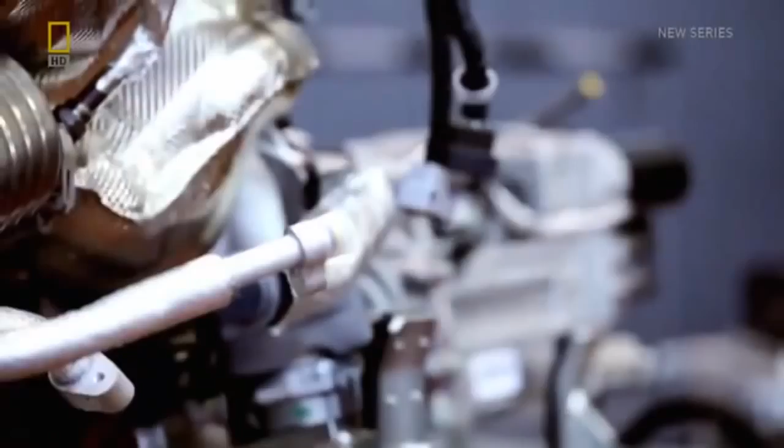The National Geographic Channel has been given unique access at the Lamborghini factory to witness the creation of some of the car's first incarnations.

This is Sant'Agata Bolognese, a typically picturesque town in the heart of Italy's Emilia-Romagna district. But it is in fact anything but typical, as it's home to Lamborghini, one of the world's most renowned supercar manufacturers. The factory is situated in the heart of what is known as Motor Valley in northern Italy.

Sant'Agata is intrinsically linked to Lamborghini's success, according to its head of communications, Raffaello Porro. Everybody in the world recognizes our cars come from Sant'Agata Bolognese. And so our factory is a kind of temple where people come - they can say it's a pilgrimage - to visit where those cars come from.

The factory has seen many changes over the years, but its purpose has never wavered: to produce vehicles that challenge the status quo. And a largely local workforce is a vital part of that ethos.

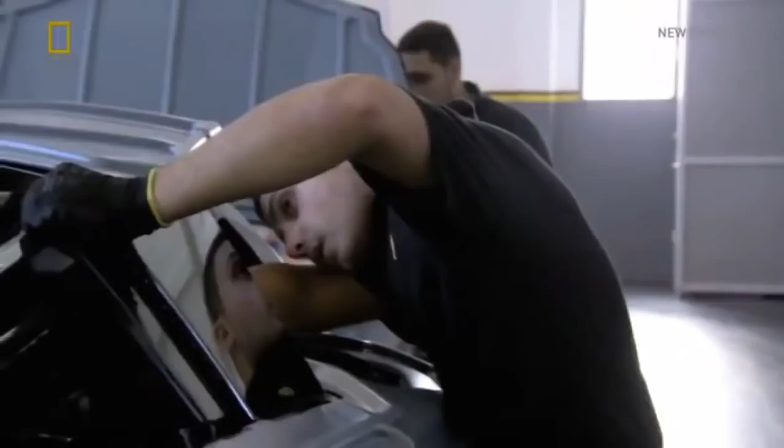These people are Lamborghini's lifeblood - over 400 individuals working with a singular aim: to produce high-end vehicles that consistently capture the public's imagination.

In the last couple of decades, a new breed of creative and high-tech vehicle specialists has emerged. Companies such as Pagani and Koenigsegg have set their sights on toppling the most revered names in supercar engineering - names like Lamborghini.

But it's unlikely that this Italian giant will let its mantle fall without putting up a fight, an attitude embodied in the company's emblem, the Raging Bull, partly inspired by the bravery of Spain's legendary fighting bulls, one of which showed such fearlessness in battle that it was awarded a trophy for its courage in 1993.

Its name was Aventador, and almost 20 years later, its legacy lives on in Lamborghini's latest model. It's Aventador's battling spirit that Lamborghini's development team must channel.

In 2007, they're faced with the daunting task of creating a supercar that sets the standard for all others. Maurizio Reggiani, head of research and development, realizes that the only way of doing so is to take a step into the unknown.

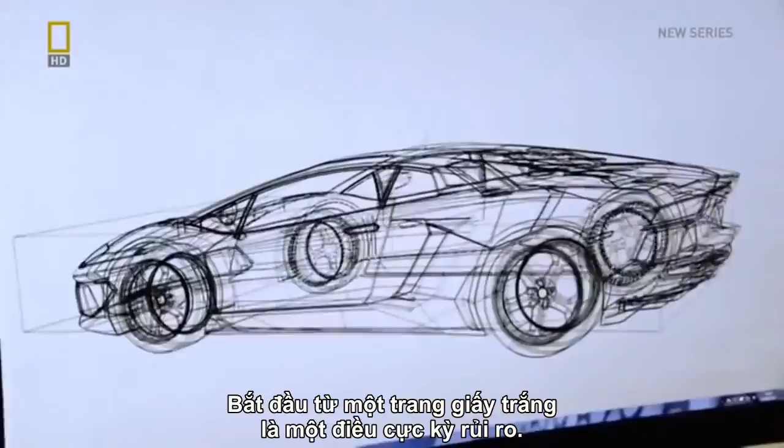To start from a completely clean slate is extremely high risk, and it's up to Reggiani to convince the board that it's the right thing to do.

This was one of the hardest things. Why? Because the project we were presenting had nothing in common with the old Murcielago, not with anything that existed in production at all. So it really meant beginning from scratch, with all the risks that come with that.

But the board decides the risk is worth taking. At the end of the day, they understood very well, because this is, again, about what Lamborghini is all about - now, to recreate and to be always revolutionary in the approach.

The spirit of innovation is apparent in every fiber of the Aventador, as Lamborghini know that the fight to stay at the top won't be won through half measures.

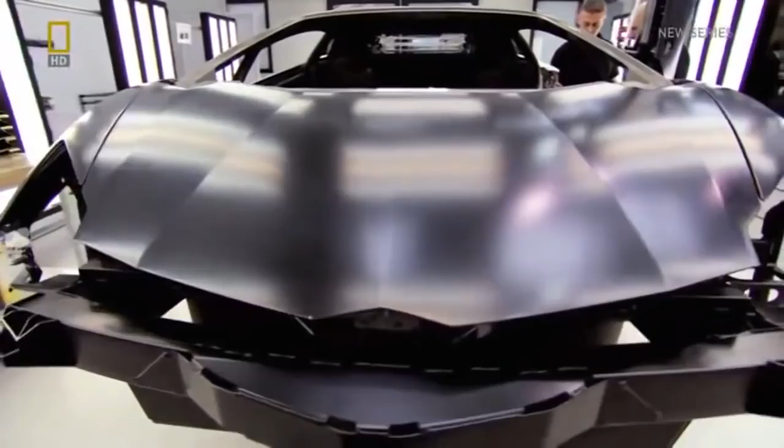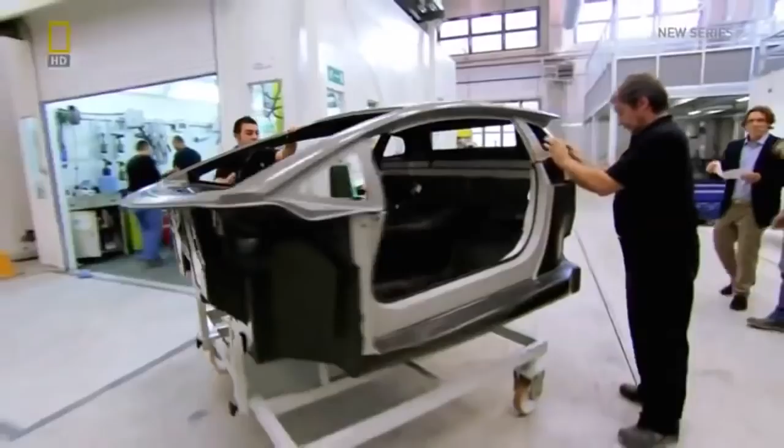And nowhere is that combative approach more apparent than in their focus on lightweight construction, which they've taken to new levels with an entirely new concept for road cars: a full carbon fiber monocoque. These structures are common in racing cars, but the high cost of materials and laborious production methods have made them unavailable to supercar manufacturers, who've had to combine carbon fiber with cheaper, heavier elements, such as aluminium. That is, until now.

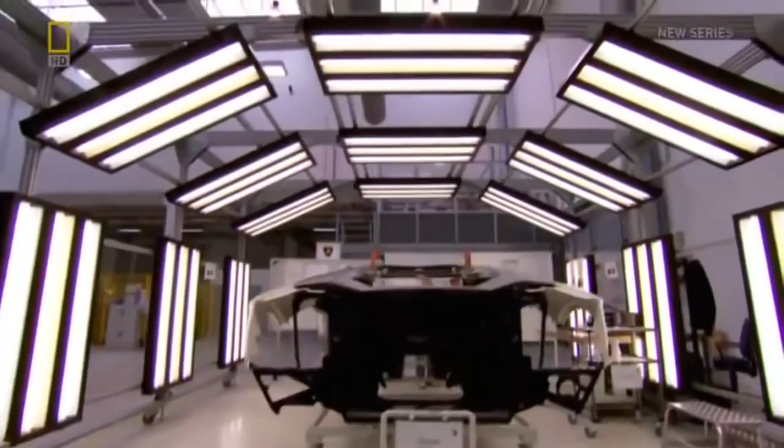The development team has devised a method that allows this race car technology to be mass-produced. But it requires a specialist facility that's up to the task. So in 2009, they build a whole new mega factory just down the road from the company headquarters, devoted to constructing the Aventador's unique carbon fiber body.

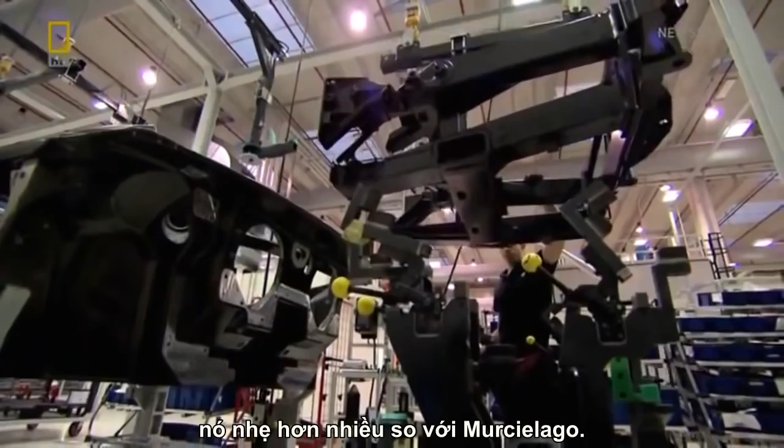Which, being just 147.5 kilograms, helps make the Aventador significantly lighter than the Murcielago, considerably improving the all-important power-to-weight ratio, and in turn, the handling.

Lamborghini hopes that this innovation will stave off the threat by the new wave of rival companies. Lamborghini knows well what it's like to be the cocky young upstart, vying to unsettle the established names, as that's how it began almost 50 years ago.

The man upsetting the status quo back then was the company's founder, Ferruccio Lamborghini. He had made a fortune from a tractor manufacturing business and used some of his money to satisfy his love of sports cars.

According to Lamborghini legend, when he went to Ferrari to critique some of their parts, his views were dismissed. He got a negative response out of some requests he had and proposals to make a better car. And so he said, I will found my own company and I will create the best super sports cars ever.

He established Automobili Lamborghini in 1963, and for the next few years he toiled furiously to achieve his goal. The cars he created were well received, but it wasn't until the launch of the iconic Miura in 1966 that Lamborghini really made its mark.

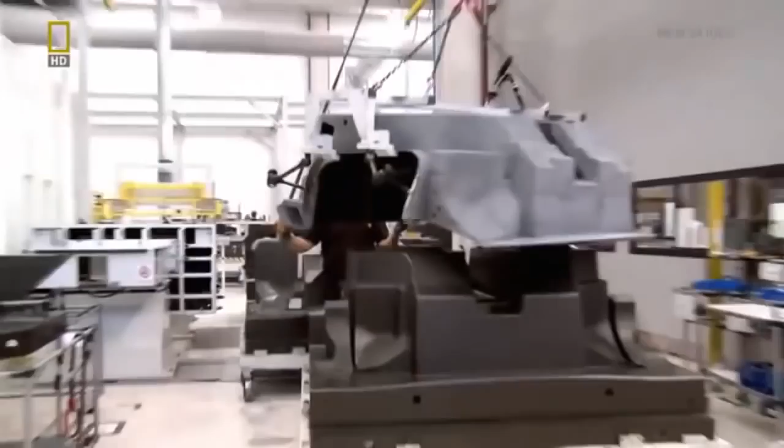As demonstrated by its approach to the area it believes will define the future of sports car engineering: lightweight carbon fiber construction. The company's relationship with carbon fiber goes back as early as the 1980s, when it created the Countach Evoluzione, a concept car which experimented with the use of composite materials.

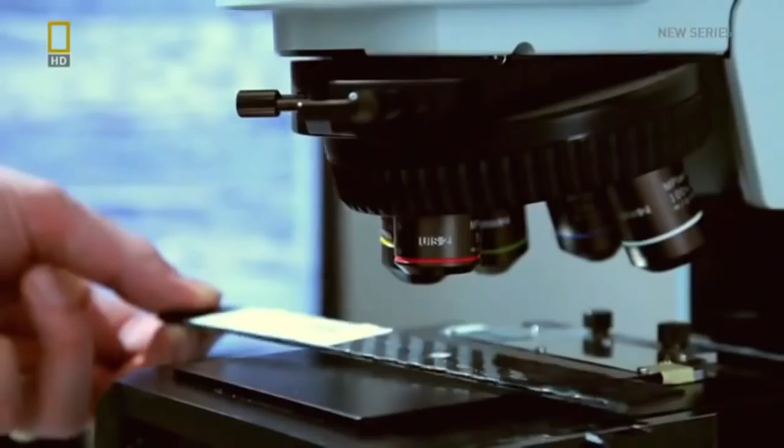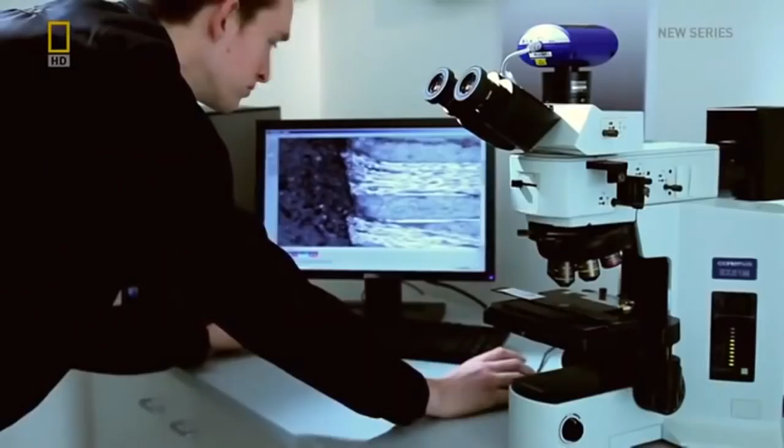It was dreamt up by the newly formed Composites Department, whose successor has made many inroads into research and development of lightweight composite materials. And discoveries made here mean that next door, the company has been able to construct its new carbon fiber production facility.

The man given this task in 2009 is Ranieri Niccoli, Industrial Director, and he must devise it completely from scratch. So, when we design and we build this factory, we didn't have any automotive benchmark. We were the only one in the automotive business to build and to run this kind of technology.

So they have to look elsewhere for inspiration. So we look to other sectors, for example, the aeronautic sector. Then we adapt and we modify their process to a Lamborghini production system in order to build our car.

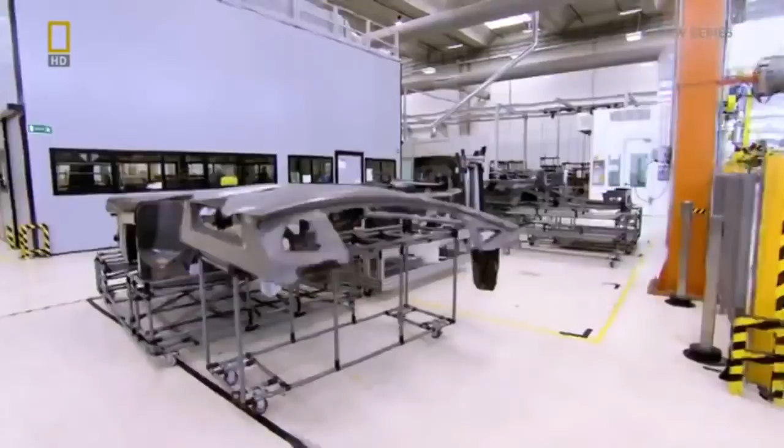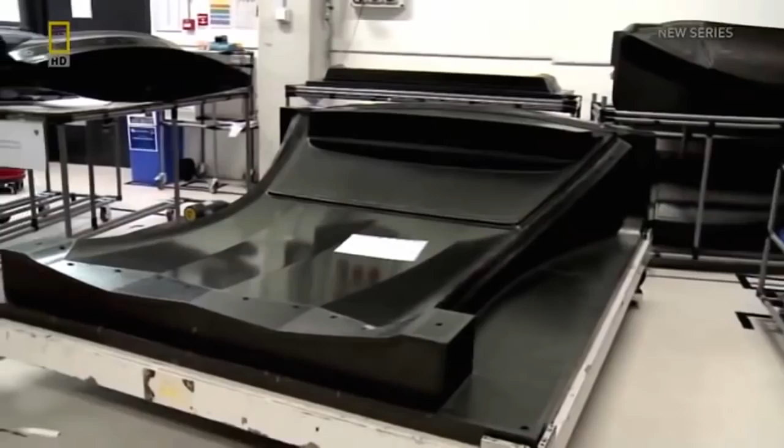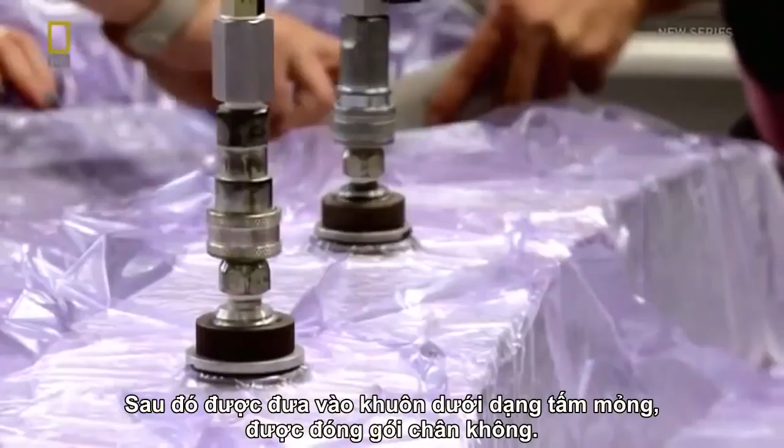To achieve this target, engineers have developed a unique production system. All materials are first cut by an automated machine before being sent for preparation. The material is placed into molds and laminated in a vacuum bagging process which forces the layers into shape, before being cured in a large pressurized oven known as an autoclave.

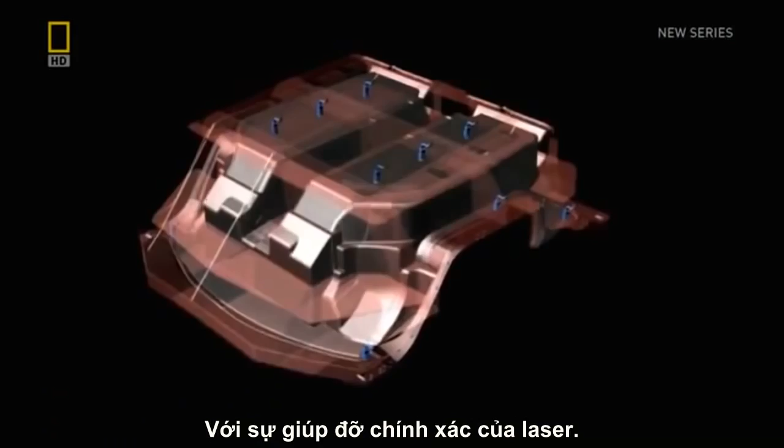Meanwhile, the production of other parts of the monocoque is underway, as operators fine-tune and cut more layers of carbon fiber with the assistance of precision lasers. A special oven is used to inject resin into the carbon fiber mats, which transforms them from soft sheets of cloth-like material to a strong, rigid structure.

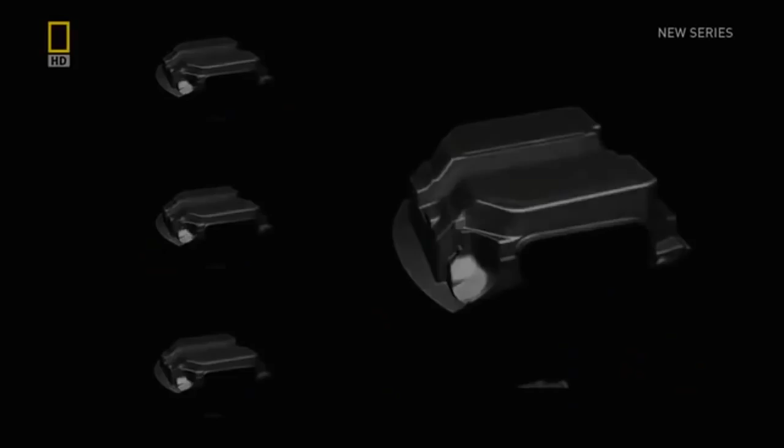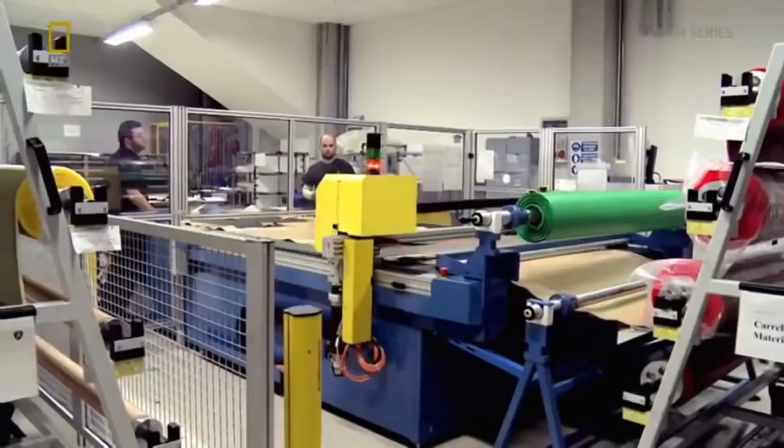After all these processes are over, the 2 key sections are finally recognizable: the base section, known as the tub, and the roof. They're placed in an automated machine, which drills them with holes allowing for attachments to be made later. Throughout the factory, computer-controlled machines share tasks with human specialists, a partnership that's integral to the Lamborghini production process.

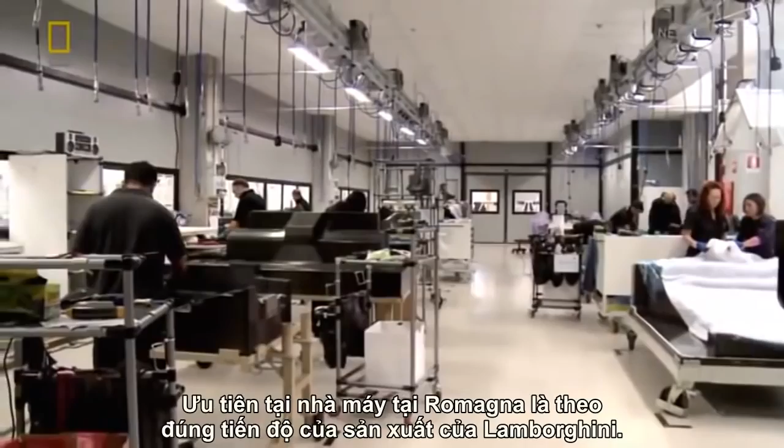The main priority of our plant was to follow the Lamborghini production system, so with a high degree of craftsmanship, high degree of skill, people, combined with a technology, with automatization process. This was the main challenge that you can also see in our plant.

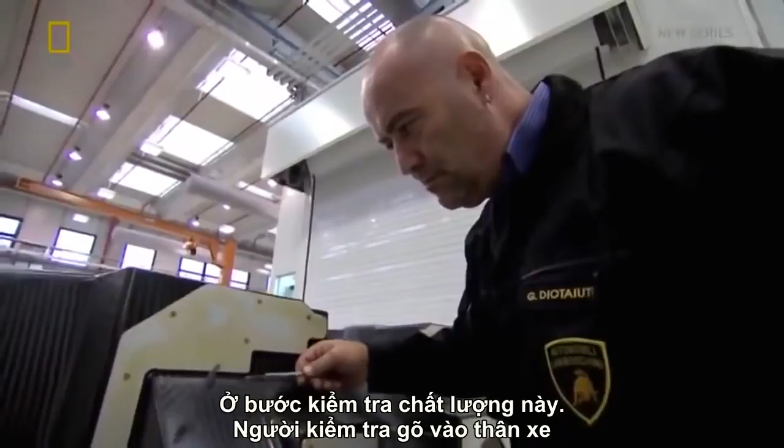Aeronautic-inspired engineering is ingrained in many aspects of the Lamborghini CFK production process, such as this stage, known as the Harmonic Hammer Test. In this quality control test, an operator strikes the monocoque section with a specially designed hammer and allows it to vibrate, listening out for areas where air might be trapped in the carbon fiber shell.

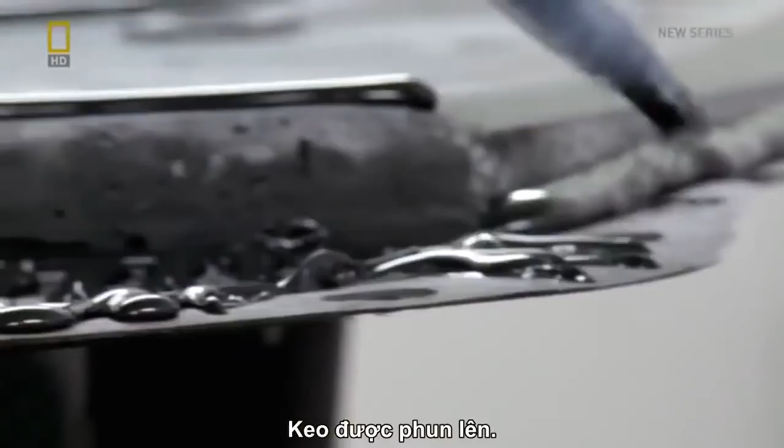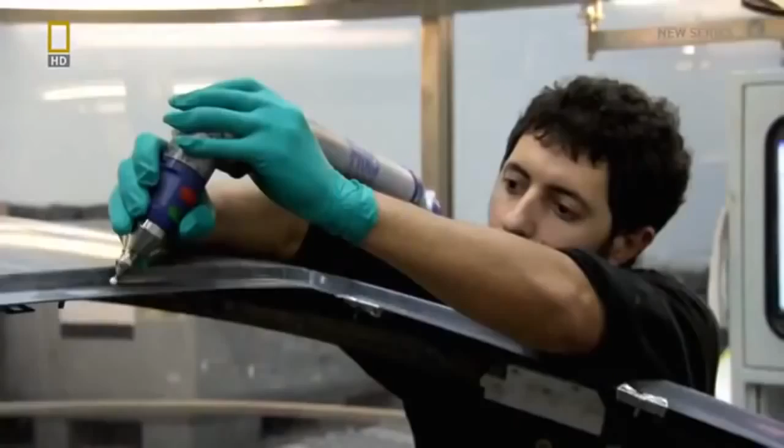Once checked, the parts are ready for their union as the tub and roof are glued together, turning the monocoque into a single entity. It's essential that the 2 parts of the monocoque are exactly aligned, so workers use a robotic arm with a 3D laser attachment to check that the sections have been coupled correctly. Once the correct dimensions are confirmed, metal sections are manually attached to the monocoque and the body is complete.

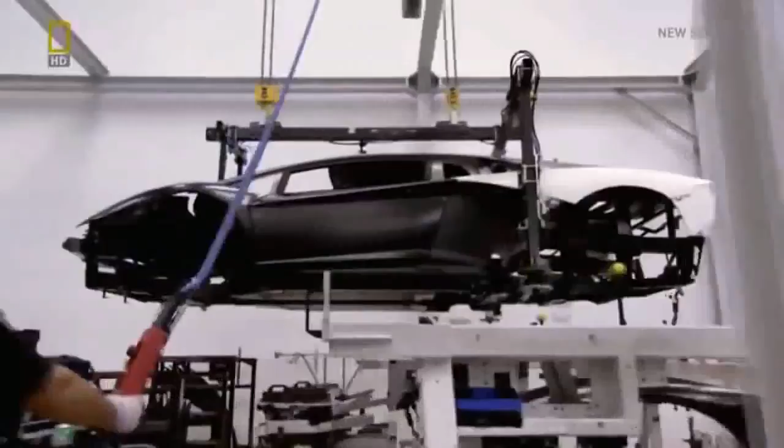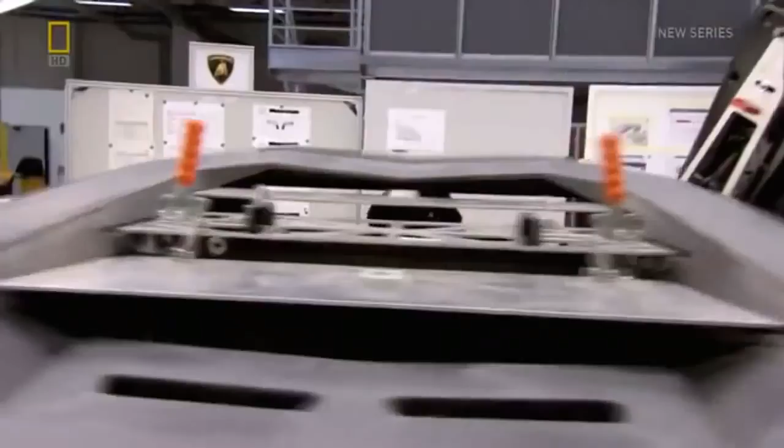Then it's into a light tunnel where surfaces are quality checked to ensure they're in pristine condition before the Aventador's body is signed off for release. As the body is ready to leave the carbon fiber plant, it's possible for the first time to see the Aventador's unique geometry taking shape.

This extreme design is one of the most recognizable aspects of the Lamborghini DNA, and it's a tradition maintained and pushed forward here, at Lamborghini's Design Center, or Centro Stile. The generational leap required of the Aventador does not stop with its engineering capabilities. The look of the car is integral to its ambition.

The design of Lamborghini always has to be revolutionary. Yes, you have to understand, if you see a car in front of you, this can only be a Lamborghini even if you don't know the model. So it's very tough for our designers because they have to create something new, but recognizable at the same time.

The job of the design team and its chief, Filippo Perini, is made even tougher during the earliest phase of the Aventador's development, when the board forces them to compete with outside companies to earn the right to design the new model. And at one point, victory comes close to slipping through their fingers.

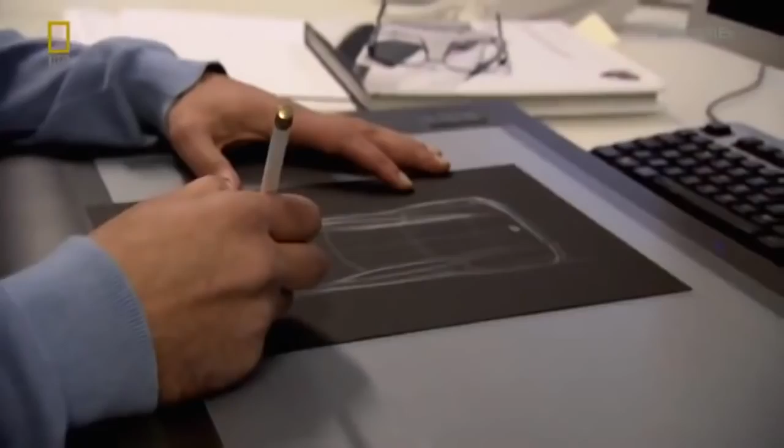The hardest moment was when, during the process, we realized that we were at risk of losing the project altogether. This was a critical point in the process when we realized that we had to be more innovative, more unconventional, more extreme, unexpected, and uncompromised.

It's tough going, but the competitive spirit has a positive effect on the team, and their proposal wins the day. What results is a design imbued with a deep understanding of the company's past. Our design is driven by the history that we have, translated into the desire to always do something innovative, to create a different object interpreted in the most futuristic way possible.

This is part of the Lamborghini history.

Certain design elements are considered vital parts of the Lamborghini flagship DNA, such as the famous scissor doors. But beyond that, the design team have free rein to create something completely new.

They have a sharp eye for aesthetics, but they also need a comprehensive understanding of the car's engineering needs, for style choices can only be made if they contribute to the car's high-level performance. Form always follows function, so there is nothing which is fake. Every air intake, every flap, everything is for real. So it's not pimped up, and this is tough, in the same way, because you have to do something which is very emotional.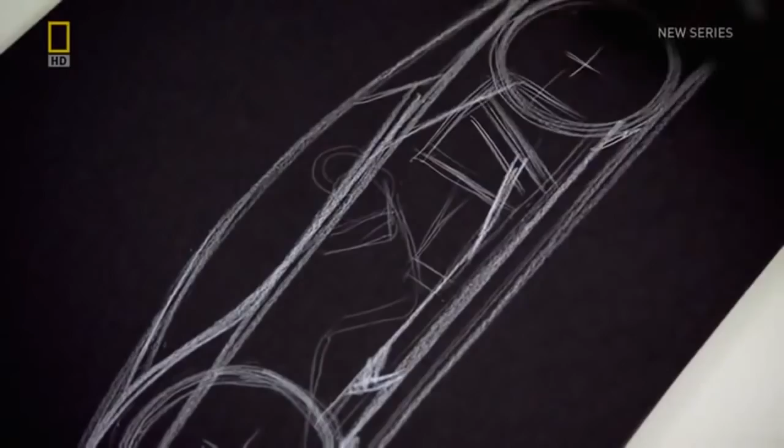One engineering hurdle for the design team is the need to provide the Aventador with sufficient air to cool its V12 engine. In terms of design, we had to resolve the problem that this car, this package, demanded a big engine radiator positioned at the side sections of the car. So it needed a large air vent, which right from the start prevented us from dividing the mass of the car into 3 separate blocks, as we'd normally do.

Going back now to the actual design, this architecture gave us the unique opportunity to design a car with one single line, this one.

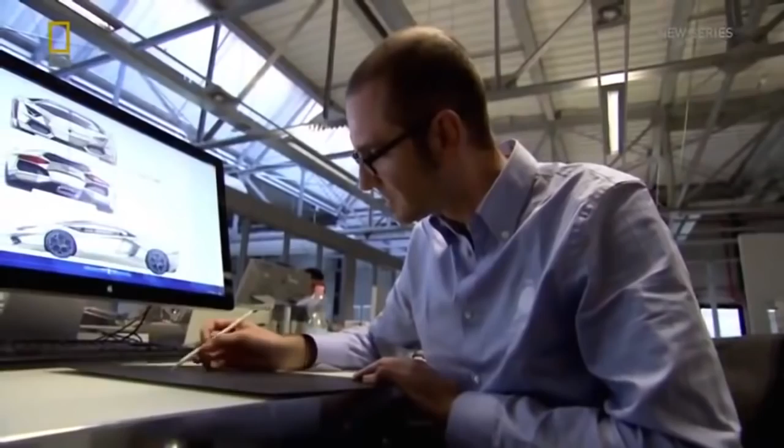What emerges from this balance is a car whose style is intimately linked with its role as a high-performance vehicle. And its sources of inspiration are many, drawn from one of the team's most important tools, the brainstorming board.

So we take it from nature, sport, technology, lifestyle, elements that we can integrate, and in that way, brainstorming gives us many design options.

Details like the ignition button and TFT screen seem to come direct from a jet fighter cockpit. And the world of aeronautics influences a lot of other style choices besides.

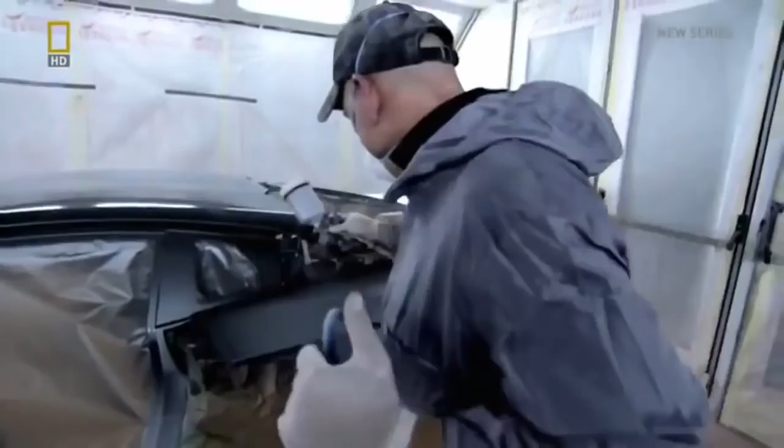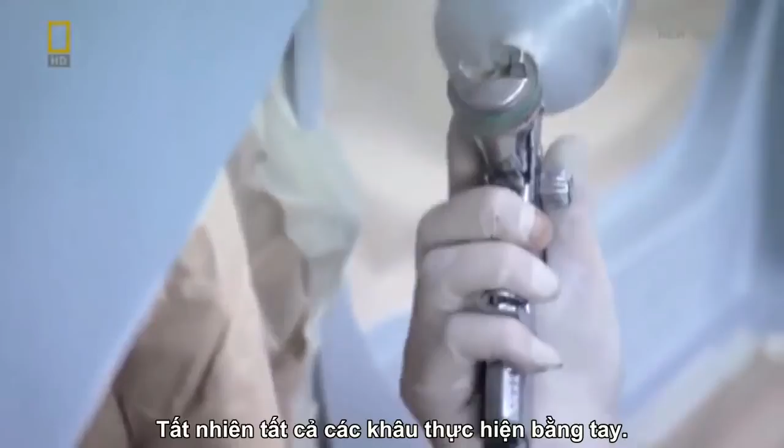The Aventador, with its extreme lines, requires more man-hours than any other Lamborghini in the past. And of course, every phase is carried out manually, as only human analysis and dexterity can ensure that each surface is covered with exactly the right amount of paint.

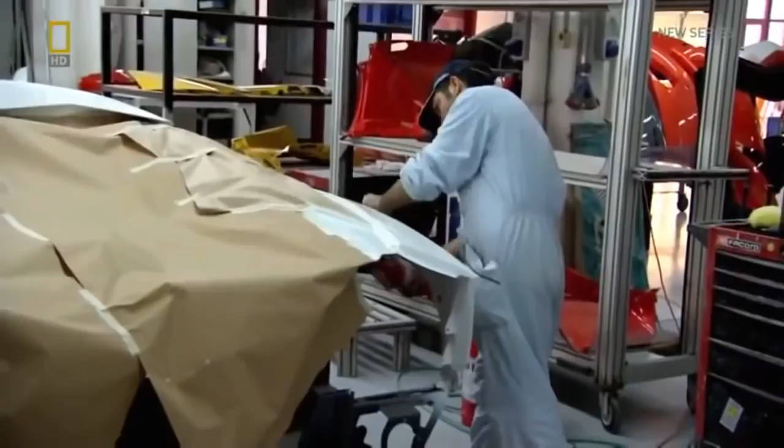In total, 200 man-hours are spent on every single Aventador while at the paint shop. 3 whole days are spent on polishing alone. After being carefully sanded, the Aventador is repeatedly buffed with special materials.

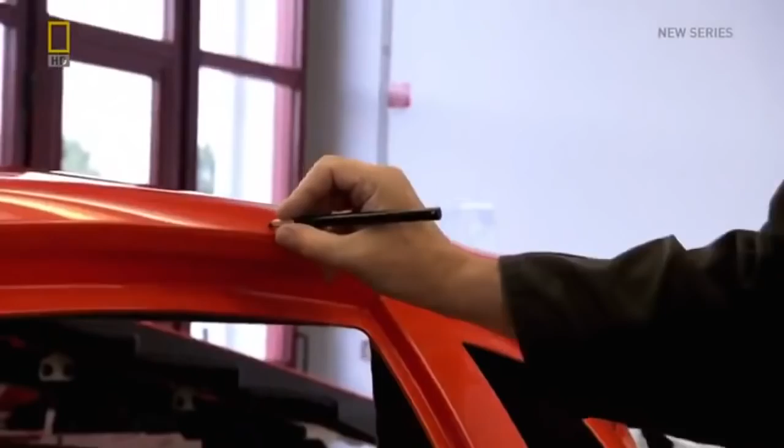After that, it's sent for another quality check in a light tunnel. For 2 hours, an inspector walks around the bodywork, checking for colour perfection. If there's any inconsistency, the offending section will be sent back to be repainted.

Under-polished areas are also marked out for extra attention. These hundreds of hours of devotion end when the exacting standards of the inspector are met, and the car is released for the next phase of production, the assembly line.

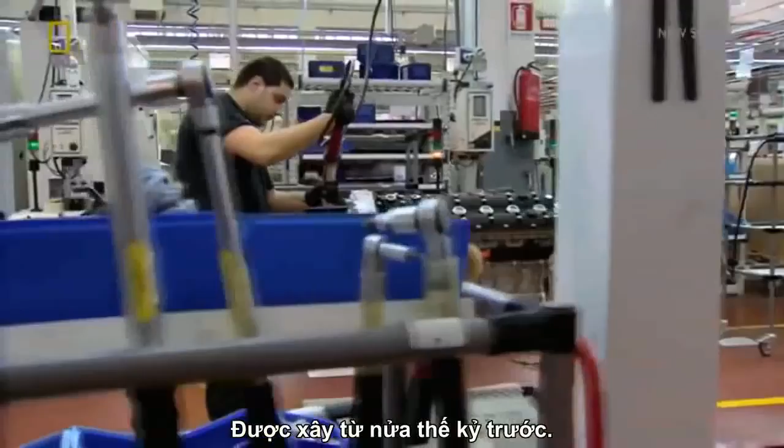The assembly line for the Aventador lies just meters from the original site of the Lamborghini factory, built almost half a century ago. Back then, its founder, Ferruccio Lamborghini, was known for his hands-on approach, frequently seen on the factory floor, directing operations. He focused on the skill of the mechanic as being key to the success of the product, and that attitude still permeates the site today.

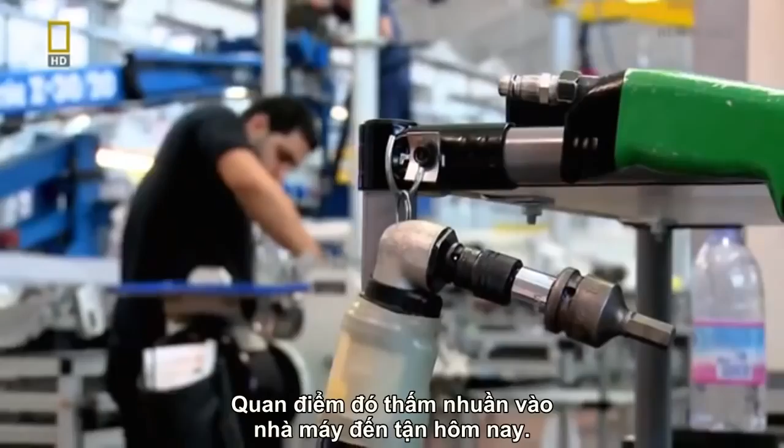Here, 50 workers spread over 11 workstations are responsible for the task of assembling Lamborghini's latest model. The man in charge of making sure things run smoothly is production manager Andrea Costantini. He sees his highly trained workforce as a direct link with the roots of the company.

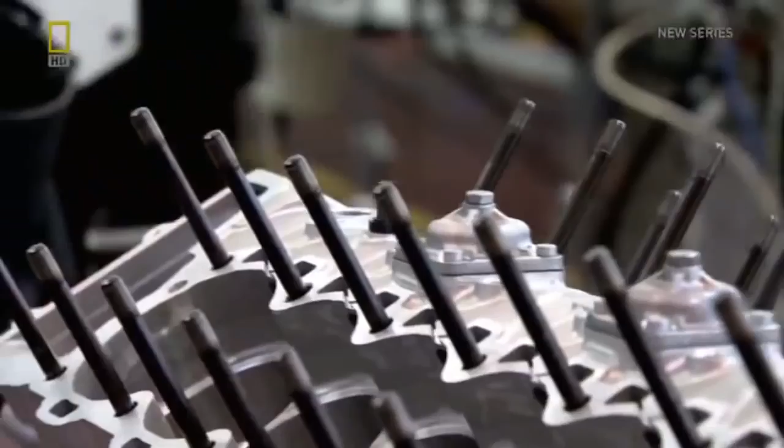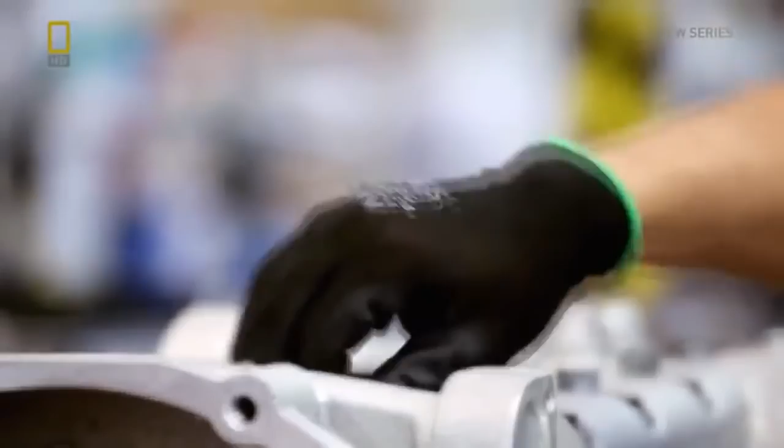In this case, the workers are the most trained. We take these guys directly from the best schools of mechanics in Emilia-Romagna, here in the surroundings of Lamborghini, and we train them for more than 2 years to allow them to be really the best experts on mechanical engines. So everything is done manually, still like we did since 1963, since Mr. Ferruccio Lamborghini, the owner of Lamborghini, started.

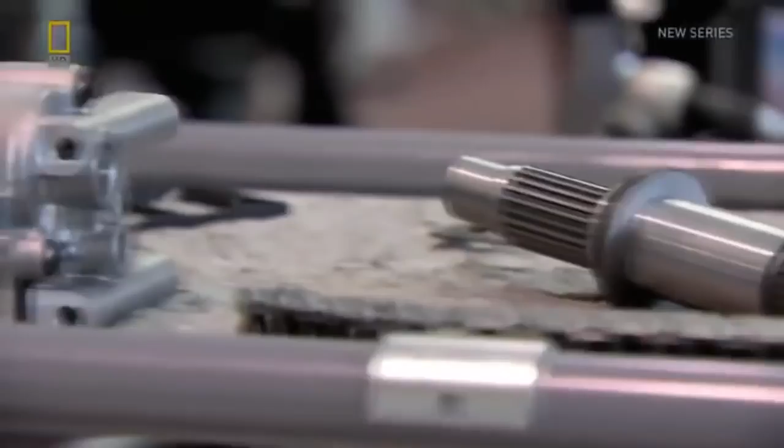In an age when machines dominate production in almost every field of manufacturing, loyalty to the art of skilled manual labor is not often seen. But here it's believed that when it comes to reliability and precision, humans still have the edge over machines. And nowhere more so than in the engine assembly station, for this is where the heart of the Aventador is put together: the Lamborghini V12.

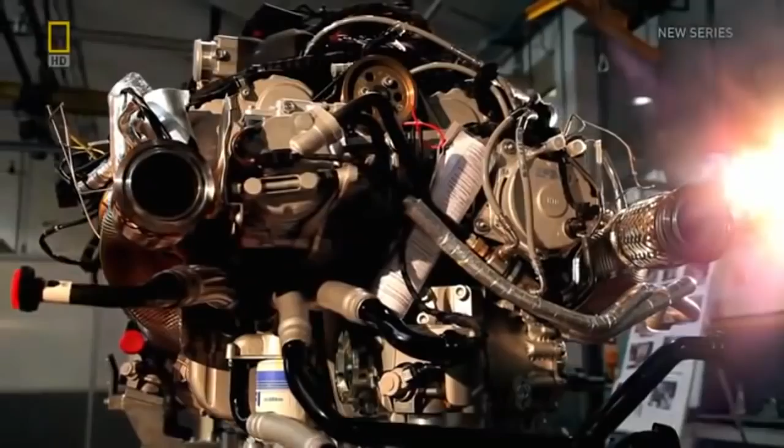At a time when many sports car manufacturers are shying away from using the 12-cylinder engine, Lamborghini is resolute. The V12 always has and always will provide the power for their flagship models.

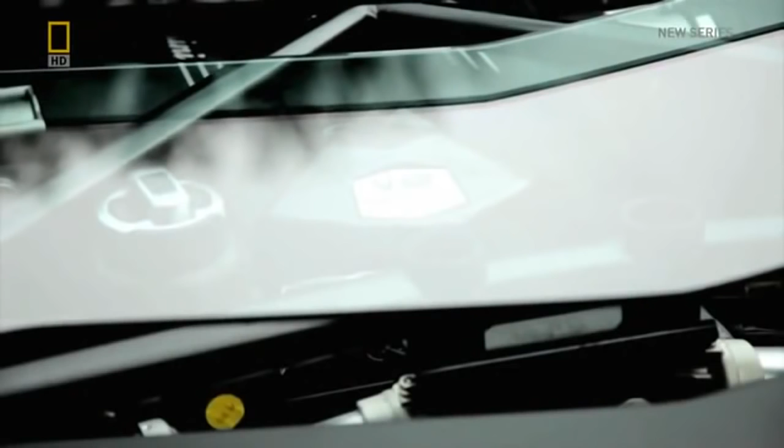The V12 for Lamborghini is part of our DNA. Everything for us is rooted in our history, which started with the 12-cylinder engine. With 6.5 litres of displacement and 700 horsepower, the Aventador's V12 is about as gutsy as it gets.

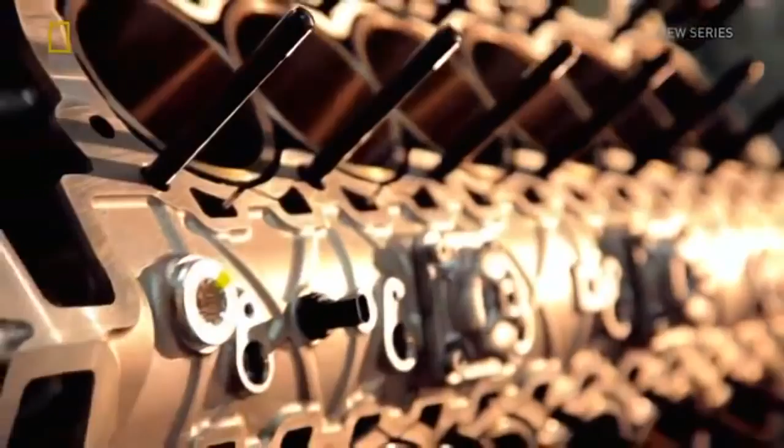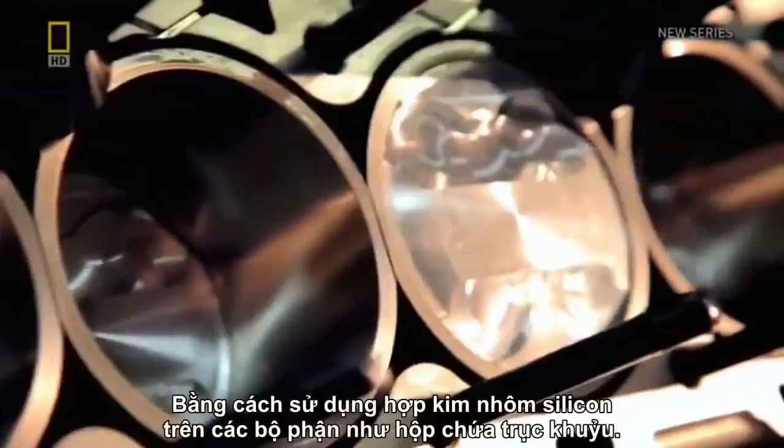But as with everything else, it's had to move with the times. Lightweight, again, is the order of the day. Despite the fact that this engine is more powerful than the Murcielago's, it weighs less, just 235 kilograms, by using aluminium silicon alloy on components such as the crankcase.

The main purpose of the V12 is to power the Aventador, but when linked with the car's exhaust system, it takes on another significant role: creator of the mighty Lamborghini orchestra. The V12 motor represents what for us is the sound, the music of the car, the way in which it's presented to the public, the way she makes herself heard and announces her arrival.

To achieve this, we invest a great deal of time in simulations. We simulate the sounds that we can have, and then we experiment first in the lab and then on the vehicle itself. This 12-cylinder symphony has a full range, from a moderate rumble through the town at low revs to the screaming crescendo of maxed-out gear shifts.

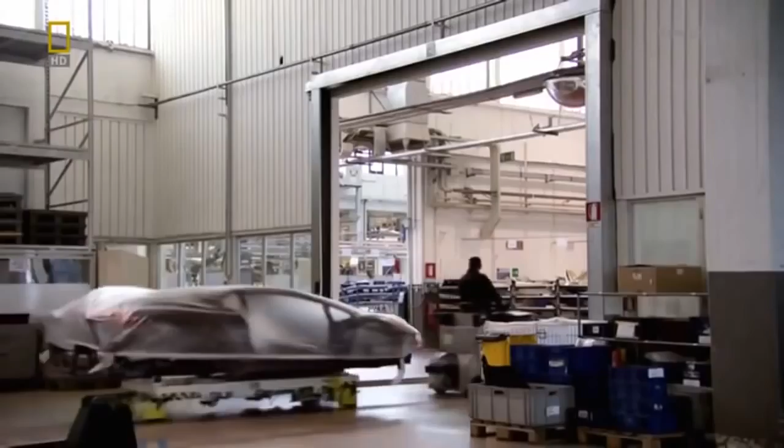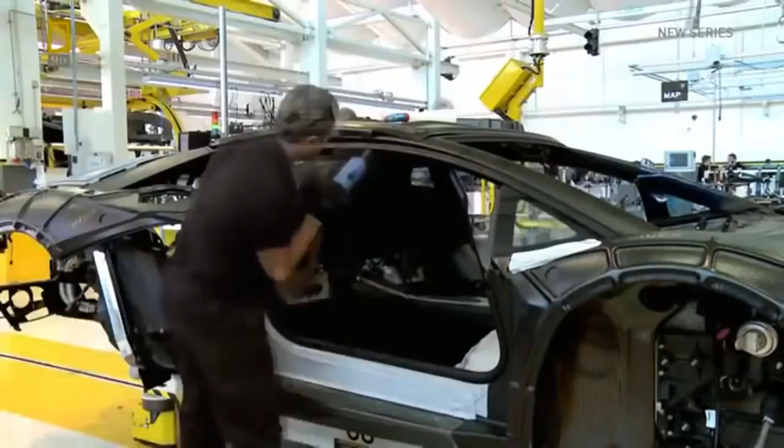While the V12 is being assembled, the body of the Aventador arrives on the assembly line, ready for conversion from an empty shell into a fully functioning supercar. As the company's latest foray in a highly competitive market, the Aventador needs a production process with efficiency to match.

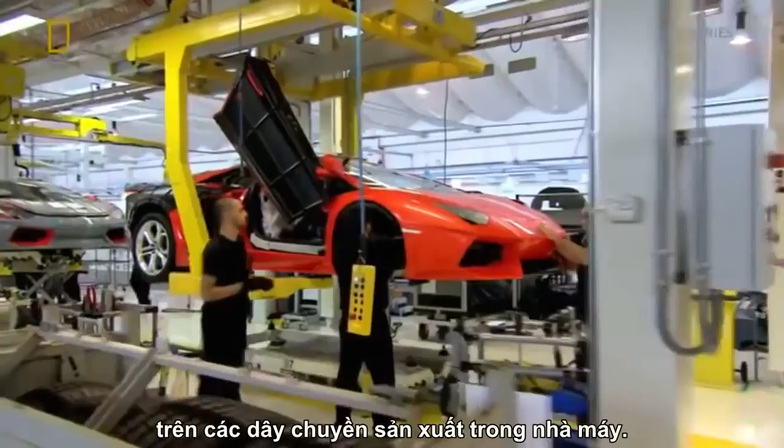The drive for improved efficiency was for sure coming from the market, from our competitors. We have always to be the best, to be the number one in terms of product, in terms of performance, but also in terms of quality. So to become and to stay number one, we have always to have a huge increase of efficiency, a huge increase of quality in the assembly line and in all the processes inside the factory.

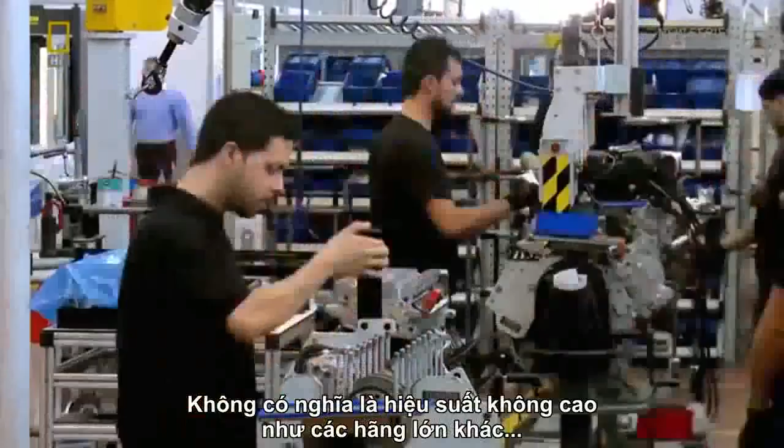The company's output of luxury vehicles is a mere fraction of what the large-scale manufacturers produce for the mass market, with around 800 Aventadors due to be created in the first year. But that doesn't mean the factory can't be run to similarly exacting standards of efficiency as the largest groups.

That means workers have just 1 hour and 40 minutes to carry out a whole range of highly meticulous tasks. If they take too long, the whole assembly line will stall, targets will be missed, and costs will mount up.

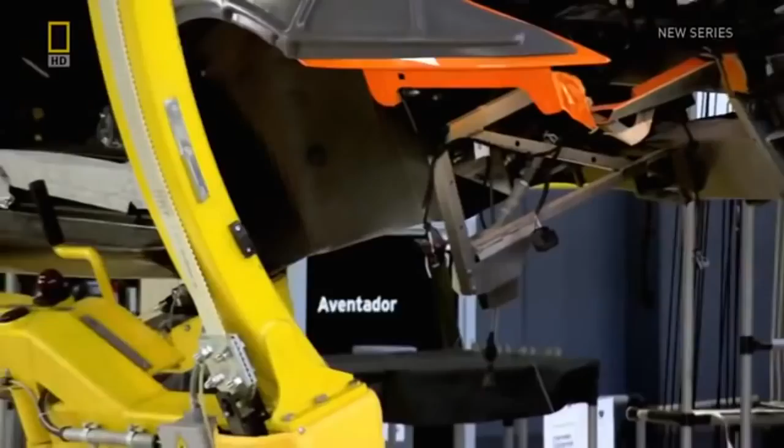The countdown starts here at the first station. Work is carried out on the underbody and front differential by lifting and rotating the vehicle to give the mechanics easy access.

Before being readied for what is arguably the most significant stage in the Aventador's production: the insertion of the colossal V12 powertrain into the car's chassis.

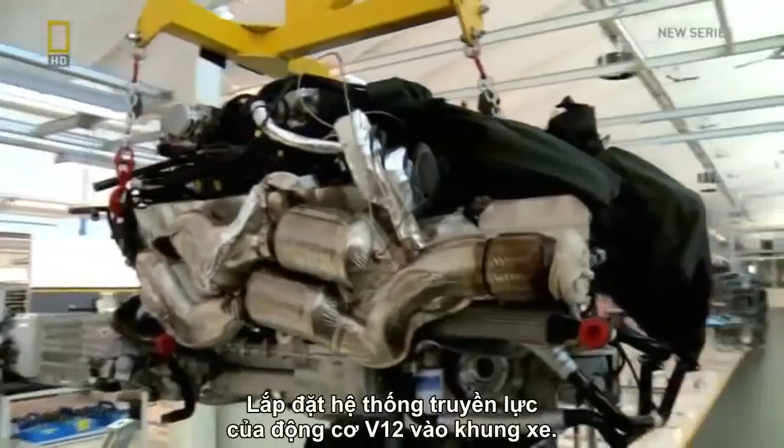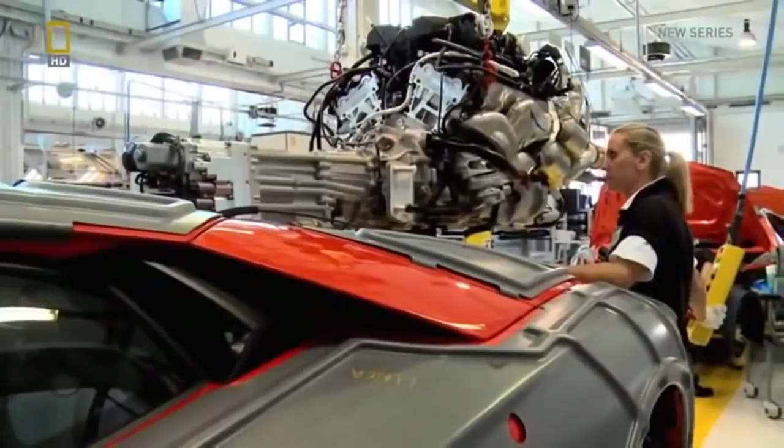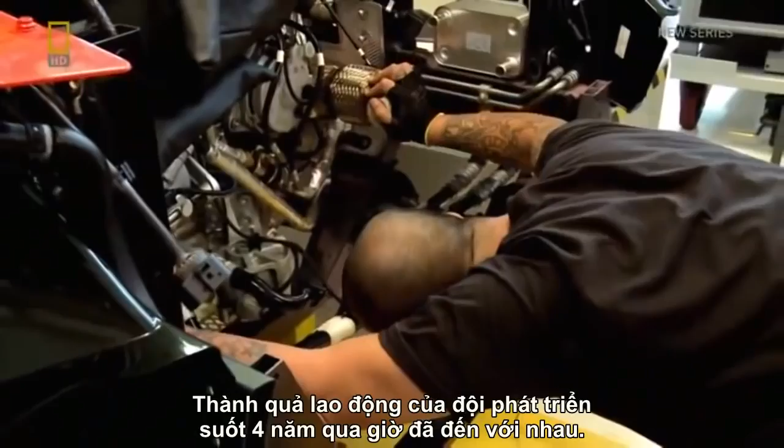Here we are in the most critical assembly station of the Aventador assembly line. This is the assembly of the engine, the heart of the car, inside the body. We call it the marriage between the car and engine. This marriage of elements is when the development team's work of the past 4 years comes together, where design and engineering combine.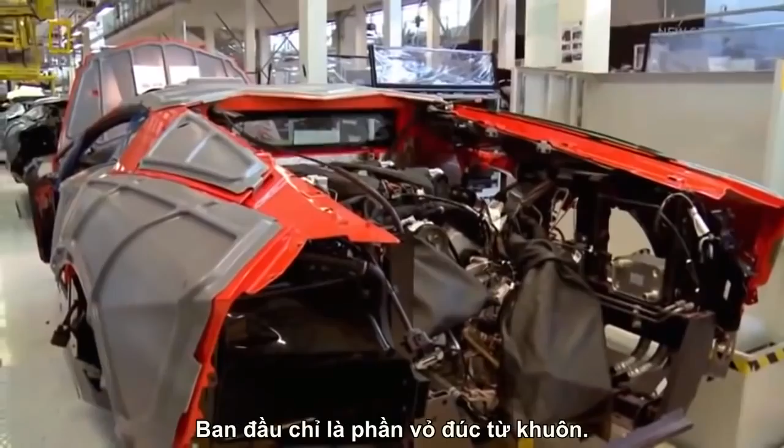As you can see, this is absolutely not done with equipment, a robot or other automatics, but is done manually. Step by step, the car is taking shape, being molded from empty shell into the fully formed supercar that will leave the factory.

And while the assembly line is in full flow, next door, the second critical aspect of the Aventador is being prepared: the interior. It's in this sector of the factory that a customer's individual preferences for the way their car looks can really be indulged.

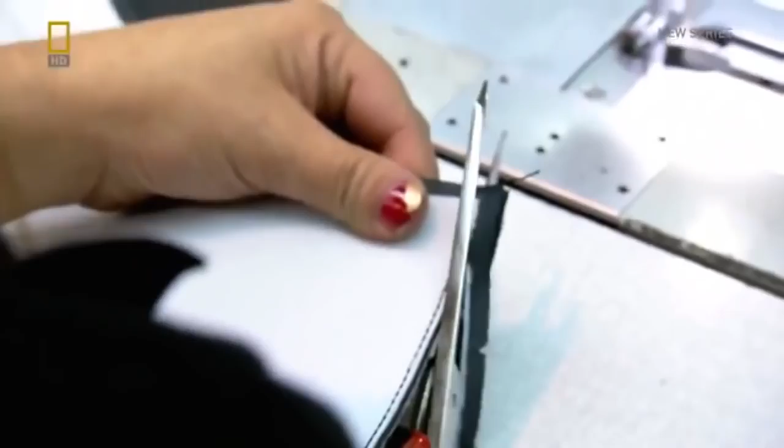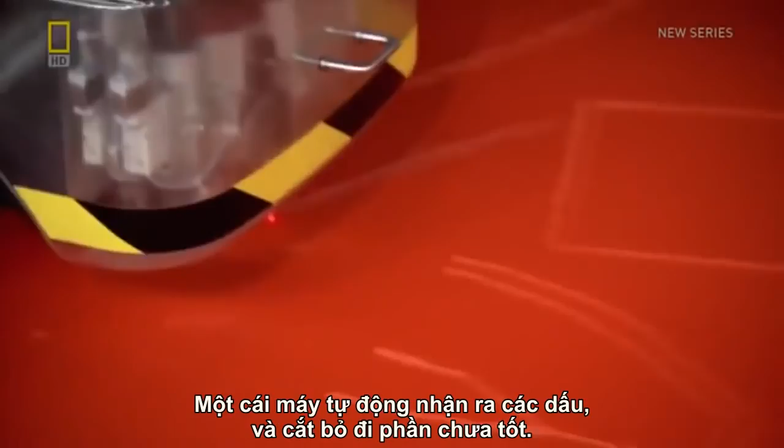About 100 square meters of leather hide in 9 different colors arrives each day. Attention to detail is essential to pass the stringent quality control checks. Here, a leather specialist looks for minor imperfections in the hides and marks them up wherever found. An automated machine recognizes the marks and cuts around imperfections, leaving only pristine material for the Aventador's interior. The leather is then taken to specialists with 3 years training to be stitched and glued onto the various parts that make up the Aventador's interior.

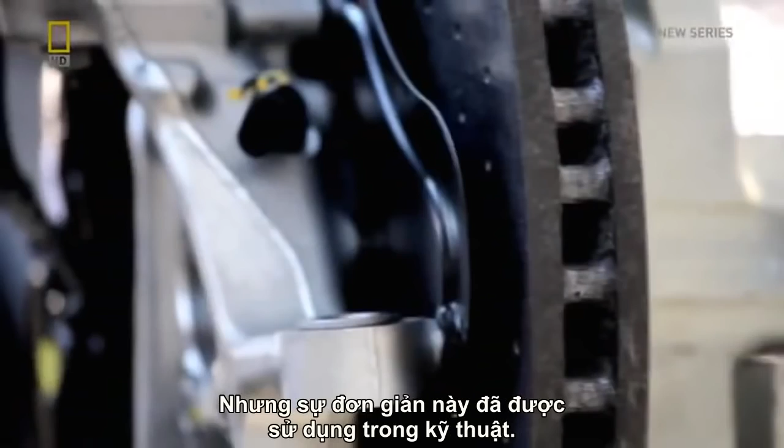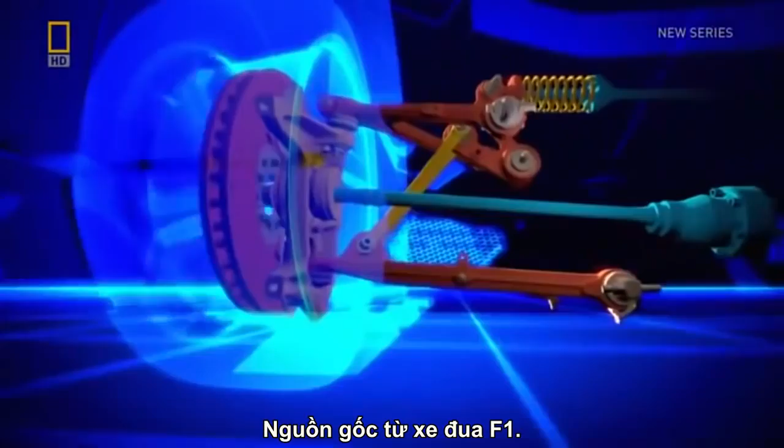Back on the assembly line, one of the Aventador's most important pieces of kit is ready. This simple-looking item is the suspension, but its apparent simplicity belies the creativity that goes into its engineering. The Aventador uses a pushrod suspension system direct from the world of Formula One race cars. It works by keeping wheel control and damper elements separate. By keeping the damper elements inboard, the pushrod system allows the wheels to maintain maximum contact with the road when going round bends, massively improving the handling on corners. A must for a car that can hit speeds of up to 350 kilometers per hour.

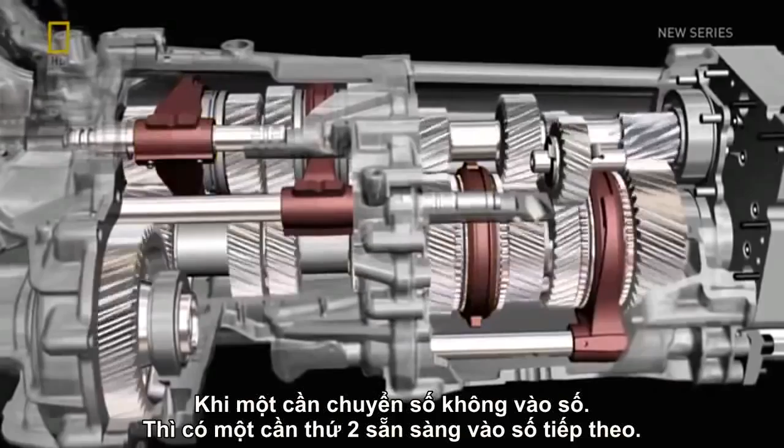But it's what's happening away from the eye that's most remarkable: the Lamborghini patented independent shifting rod transmission. This technology allows the shifting process to run virtually in parallel. While one shifting rod is disengaging one gear, the second shifting rod can already engage the next gear, creating a shifting time of just 50 milliseconds—not far off from Formula One transmission times, which average around 30 milliseconds.

Such technological innovations are only made possible by extensive testing of the vehicle during the development phase. And possibly the most critical moment for the engineers is when the prototype model takes to the track to be put through its paces for the first time. For the Aventador, this happens back in 2008.

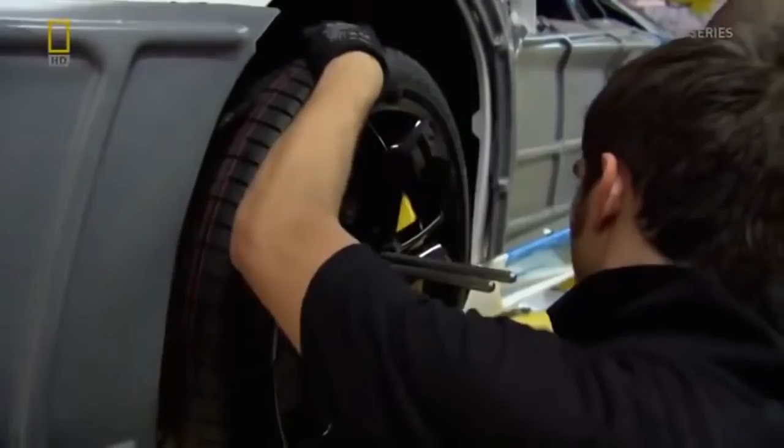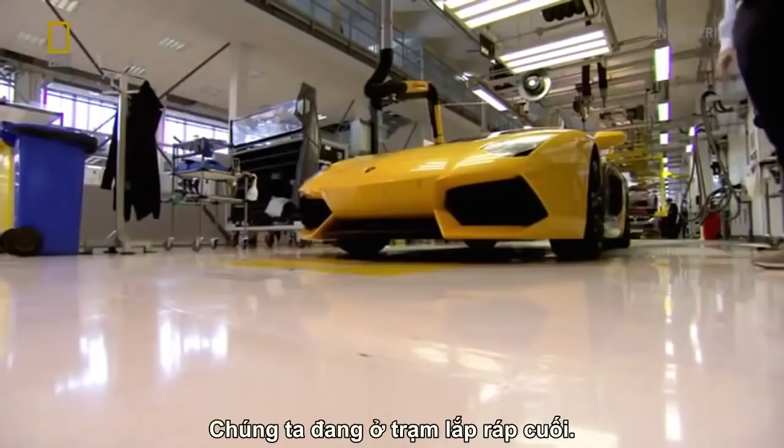The Aventador is reaching the final stages of the assembly line, and mechanics work quickly to get it ready for the next phase of production. Here we are in the last workstation of the Aventador assembly line. After 4 days of assembly, over 50 workers in the line and more than 60 in the saddlery and the engine have assembled our cars.

As important as the assembly process itself is the series of quality control checks that the car must undergo once it's complete. Any minor imperfection could impact on the car's performance, and its safety elements in particular must be rigorously tested.

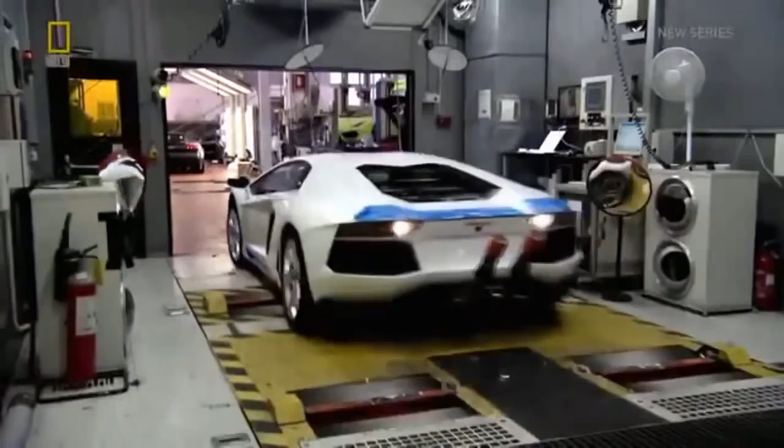The brakes are checked in a room where the car is driven at speeds of up to 140 kilometers an hour on a rolling road.

The Aventador's carbon ceramic brakes can take it from 100 kilometers per hour to a complete standstill within 30 meters. And in theory, the Aventador is capable of going from 0 to 100 and back to 0 in less than 4 seconds.

Data from the anti-lock brake system is transmitted wirelessly to 2 dishes, then into a computer mainframe for analysis.

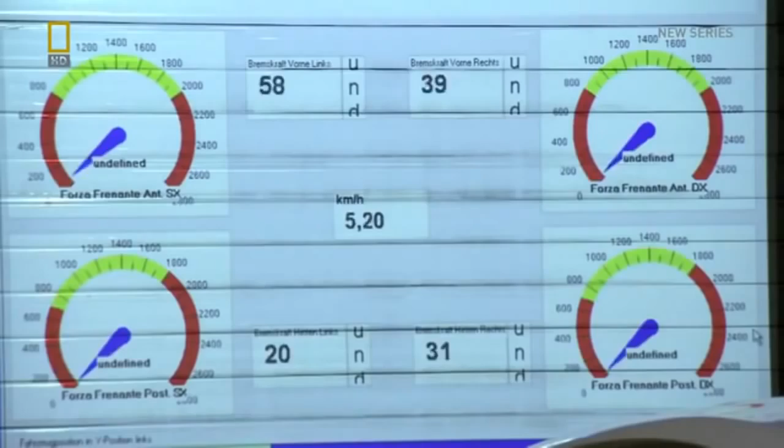The final task of the factory workers is to scrutinize the car in a light tunnel to ensure that aesthetic standards haven't been affected during the assembly process.

But before it can be shipped to whichever global location it's destined for, each Aventador must undergo one final phase: the all-important road test.

Every car is given its own test drive around the local area. They're put through their paces to check that their complex engineering is absolutely in tune. And it's here for the first time that the cars are enjoyed as they were intended to be. Only once the test driver is satisfied that all aspects of the Aventador have been properly configured will he sign it off for release to the outside world.

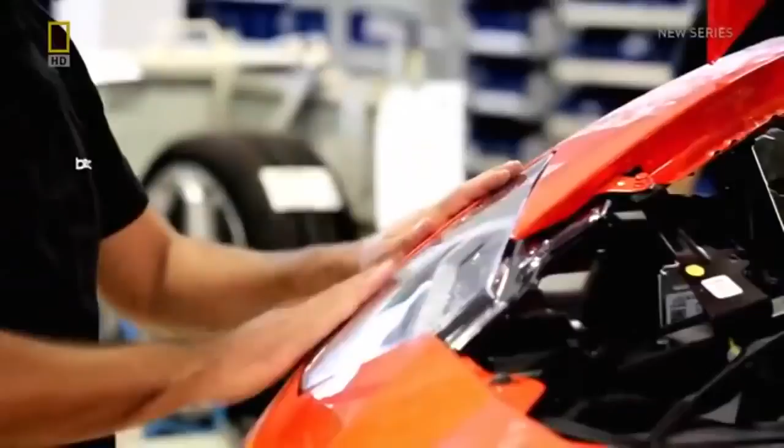The Aventador has come a long way since the brief was first given for its creation in 2007. Years of struggle from designers, engineers and mechanics have culminated in a vehicle which looks likely to remain as Lamborghini's flagship model for some time to come. The risk of starting completely from scratch has paid off.

And with the new era underway, complete examples of the Aventador are rolling off the assembly line at a rate of 20 each week.

But for Lamborghini, the challenge does not end here. As the company celebrates its 50th anniversary in 2013, it will be thinking of new ways in which it can push the boundaries of automotive engineering. Stephan Winkelmann suggests that a different era might be around the corner.

Our 2-model strategy for the future will not be enough, so we decided to step into a 3rd model. It will be a Lamborghini which you can be able to drive every day, so a very usable Lamborghini, but it will always have the DNA of the true Lamborghinis inside.

A Lamborghini for everyday use may be on its way. But until then, the Italian supercar manufacturer will focus all its efforts on producing vehicles which aim to keep them ahead of the competition. And right now, the car leading that charge is the Aventador.